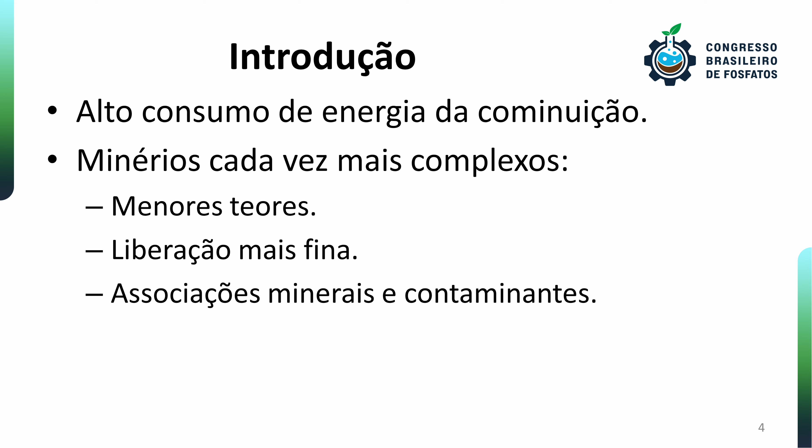To start with, we know that comminution is a phase that consumes a lot of energy. If you look at data in the literature for industrial operation, the consumption of energy in grinding is around 30 to 50% of the total energy spent in a mining operation. In addition, minerals are more complex every day. The grade is going down, the particle size is smaller, there are several contaminants. For example, here we have seen a lot of people talking about the reuse of waste, which is an extra grinding phase as well.

So, when I was developing my doctorate, I did a survey for the copper industry, and we can see clearly that from the first copper mine that had flotation, Camaquã, operated by the family of a famous Brazilian playboy, there are many interesting stories. This mine of Camaquã would grind at 212 micrometers.

The mine of Caraíba reached 100 micrometers, and they created the regrinding process, so now they are at 40 micrometers. And then we had Vale. Vale got to a product of 40 micrometers, and Salobo, where we reached 20 micrometers. They are not grinding that low, but they had that as a project. And we also have hydrometallurgical projects that are not in the table. We also have Vale Verde, which started operation in Alagoas a few years ago.

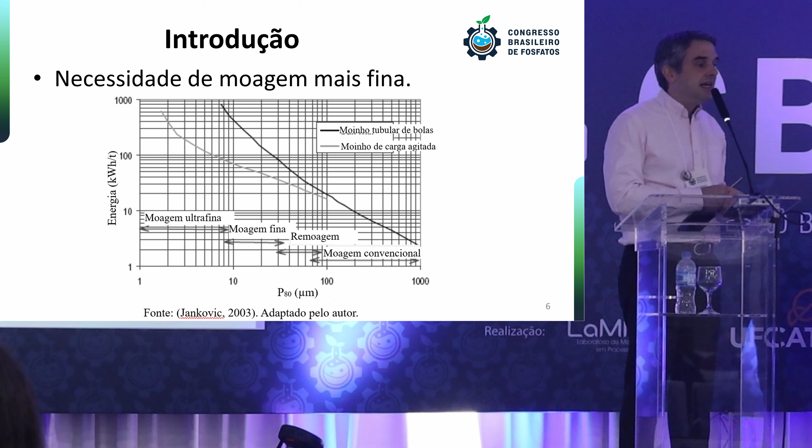They also can reach 20 micrometers. So we can see clearly that there is a trend for increasingly finer grinding. And when we start doing this finer grinding, a tube or ball mill starts not to be as efficient.

So around 100 micrometers, the ball mill is a traditional equipment that we have always used, but it's beginning to be replaced. It's still very present in many industries. But when we talk about regrinding or fine grinding, really, the ball mill consumes a lot of energy during the grinding.

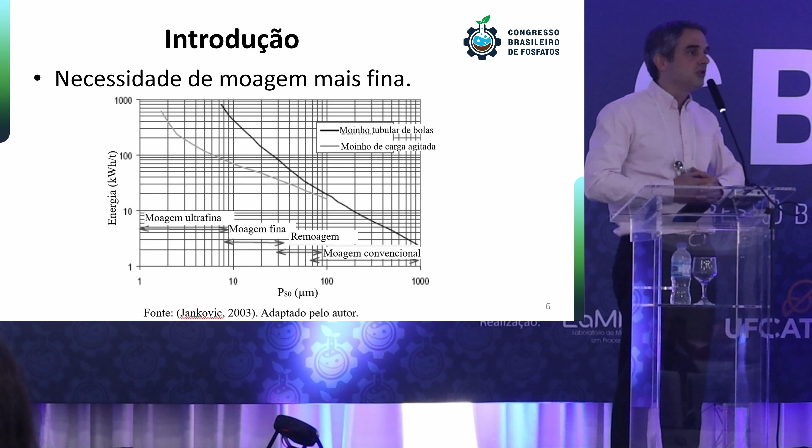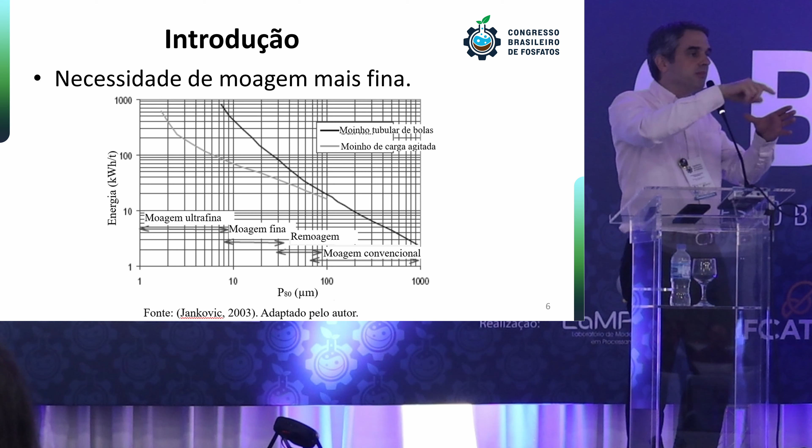That's where we have the agitated charge mill, which is different than the ball mill, where the cylinder moves the balls. In this agitated charge mill, you look from the outside, the equipment is still, and then you have a propeller to move the charge and transmit the energy to the ore and the balls. For these finer applications, this equipment is much more efficient. It's 30% more efficient. This will vary depending on the application, the ore and the particle size, but still.

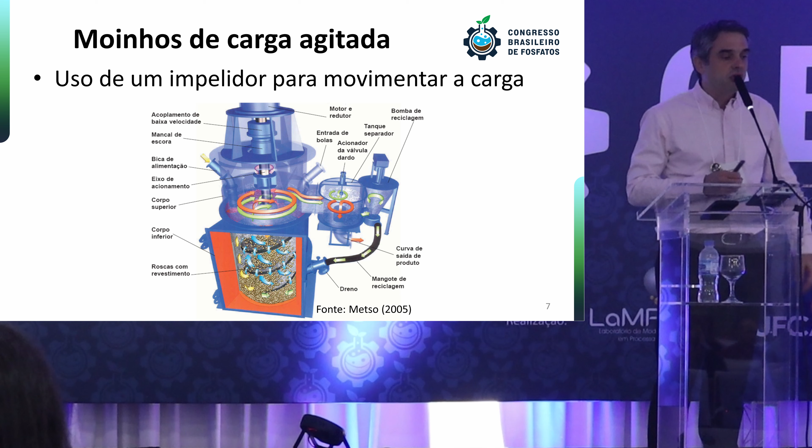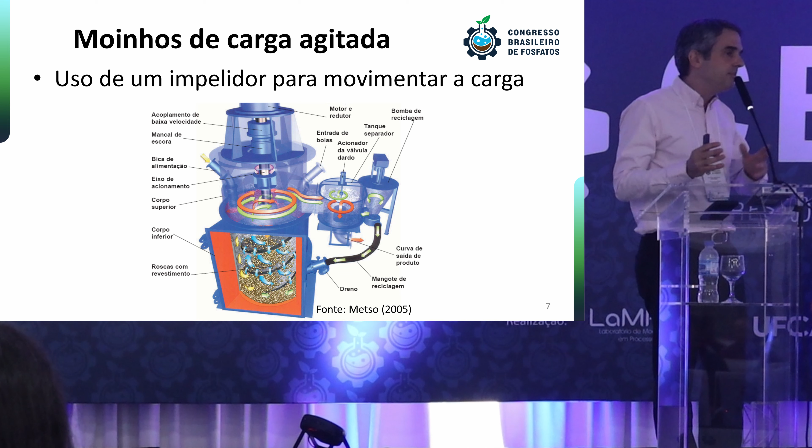So let me illustrate a little bit this agitated charge mill. It has a fixed external structure, and within you have this propeller that will move the charge and the ore. In the literature, we have a lot of descriptions of this equipment. In Brazil, I will show our installed base of this equipment. In Brazil, we see this equipment in the picture that we call the vertical mill or Vertimill. These are the commercial names.

It's a mill in the vertical position, but it can also be horizontally placed like the one we have here. This is IsaMill. It's a horizontal equipment with an axis and discs. The other picture here is the Minas Rio iron ore facility that has the greatest number of vertical mills in Brazil. We will see more information about that circuit later on.

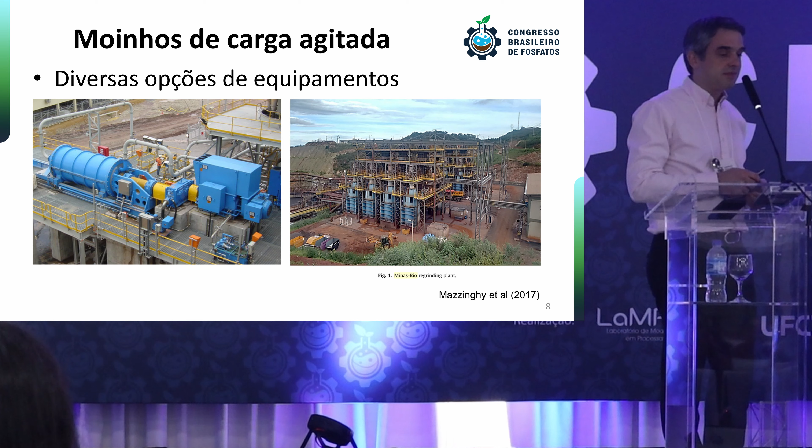Within these different configurations and technologies, we have several manufacturers in the world. We have to highlight that this is a very consolidated technology. Metso is the leader in this sector. It has around 500 units that have been traded, from low up to 3 megawatts, which is a power that's very significant.

And we have also Metso in a partnership with STM. They create the HIGmill or VRM. It has different names depending on the brand, but it's the same manufacturer that makes both equipment. It's interesting to highlight that it also has a very large installed base, 87 for the STM, and I'm not 100% sure of the data after 2013, okay? So they have an installed base that is very large. And it's interesting, the power. They talk about 12 megawatts. So here you start to see that it's for large installations, large facilities.

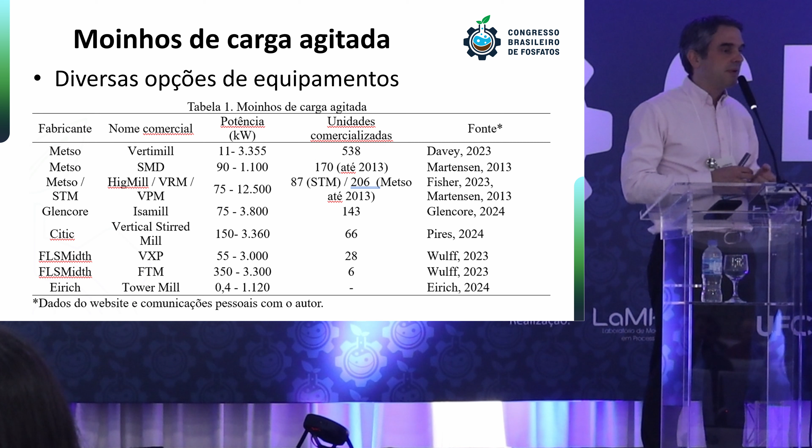We have other competitors of the Vertimill: Outotec, FLSmidth, Eirich. Eirich is a very traditional manufacturer of the Tower Mill. The equipment derives from the first manufacturer, Kubota, a Japanese company, and unfortunately with them I was not able to see what the installed base is, but I believe that it would be around 100 or 200 equipment in the whole world. I'm not sure, but it should be around there.

In Brazil, what about Brazil? In Brazil, we have several plants that operate with this equipment. The first of them was Sossego, where I had the pleasure to work in 2004 in the startup, the ramp up of the plant. And we also have Maracá and Paracatu and Samarco.

This is interesting. It should be highlighted. They have the Vertimill and the ball mill, which is a case study that allows us to do this comparison of energy consumption. It's a work that has been awarded in the international conference of our area. Minas Rio, that is the largest operation in Brazil with 16 mills.

Serrote da Laje, that belongs to Vale Verde, that has the HIGmills that do this very fine grinding, and Aripuanã, Nexa, and they have a new plant with 3 mills in their circuit of zinc, lead and copper. So you see, it's a technology that has been consolidated all over the world. It's a technology very widely used in Brazil, 10 operations basically, but it's a technology that has not really reached the phosphate industry. Let's see if we have room for that.